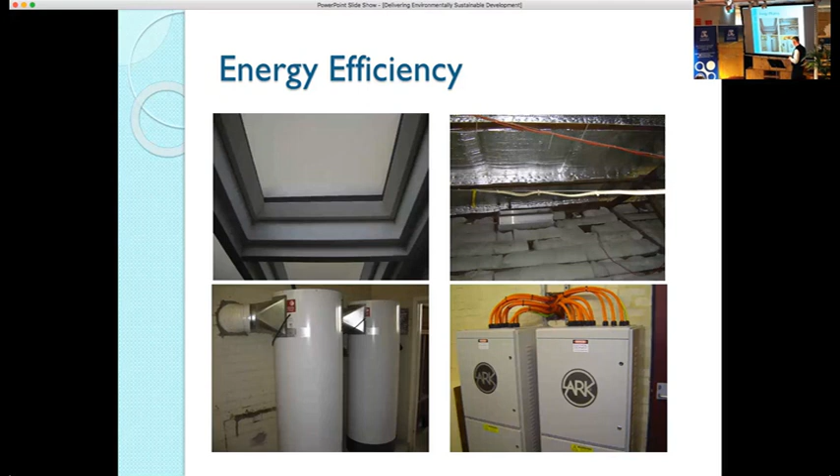Of course, thermal pool covers in the aquatic centres, and that is one of the aquatic centres that I mentioned before, with those large windows that are now triple glazed and very well insulated. Demonstrable savings as a result of putting thermal pool covers on those pools overnight, because you're maintaining a temperature of 30 degrees. It's also an asset protection thing, because it's very corrosive, humid air, and it can really destroy your building, more so than salt environments. So it helps reduce that as well. So it's a bit of asset protection.

That's not a very exciting photo, but that is a comprehensive building management system with a series of direct digital controllers that controls all of the building mechanical, some hydraulic, some lighting, and various different things. What we do now as a policy with new buildings is link the building management system to the security system through a series of relays and contactors and main switchboards, which is an easy way to control whether things are on when nobody's there. If nobody's there, then nothing needs to be on. So once that security system is armed, the electronic components in here just shut down the things that don't need to be on.

Solar PV and hot water. We've done a lot of smaller solar systems, but a couple of years ago we moved into the commercial space. We've pretty much maxed out the roof that we can in most of the council buildings now, so we've got about 660 kilowatts installed across council buildings. There's bits and pieces more to be had. We've got what we call a solar on lease program. We work with community groups that are lessees of a council building, but they pay the utilities.

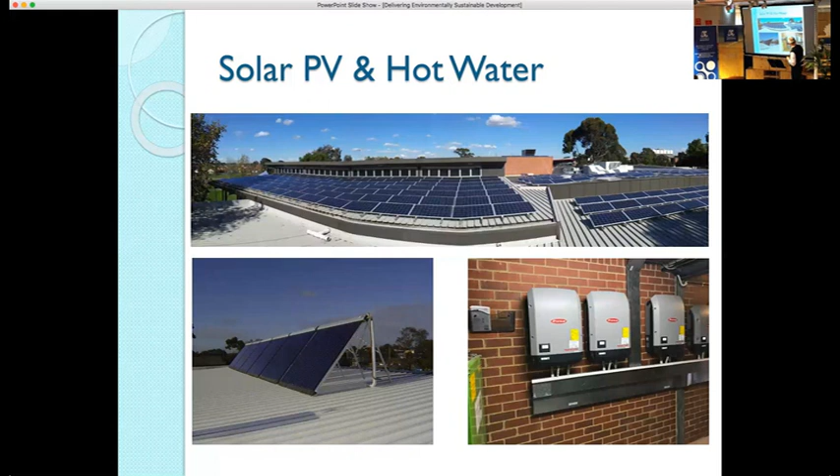The project we developed actually won a UN award last year, because it was giving those community people access to solar without having to come up with the capital. We design, install, own and operate a solar PV system on a council-owned building where somebody else is paying the utilities. The tenants then pay us back over 10 years, but only with 80% of the savings achieved by the solar system, so they get a 20% saving on their electricity bill straight up. Once that's paid off, all the savings go to them and they won't be charged for any maintenance. So that's an 80 kilowatt system at the Coburg Leisure Centre. And of course, the commercial scale solar hot water at some of the aquatic centres, and the inverters that go with those large systems as well.

Then we get into HVAC. We've done a lot of work on HVAC. Before solar became so cost competitive, and I remember years ago, when I was at Darebin Council, they asked me to do a paper on a microgeneration feasibility study, and that was back in the days when the general price of solar was around about $4.50, $5 a watt. And it's quite a bit different now. And of course, back in those days, it really wasn't financially viable.

So if you did it, it was for aspirational reasons. But essentially it's all changed now. The school of thought in those days was do all your energy efficiency, establish your base load, and then put an appropriately sized solar PV system on. The irony of that is that if people didn't want to do energy efficiency, the solar PV is probably the best bang for buck as far as energy efficiency is concerned. And obviously we're not promoting doing that.

But what was the best bang for buck back in those days was the HVAC systems, because generally you would find, particularly in a commercial building, that 60% of your load would have been heating, ventilation and air conditioning. So there's a series of examples that we've done there. The council has an aspirational target to move away from fossil fuel for stationary energy.

Pretty much all the new buildings we bring on stream now are all electric buildings, and it's mandated that 20% of the energy that is likely to be consumed by that building has to be produced with renewables on site. So it mandates a solar PV system as part of the build. But pretty much the only place we use natural gas now is to heat water in public pools.

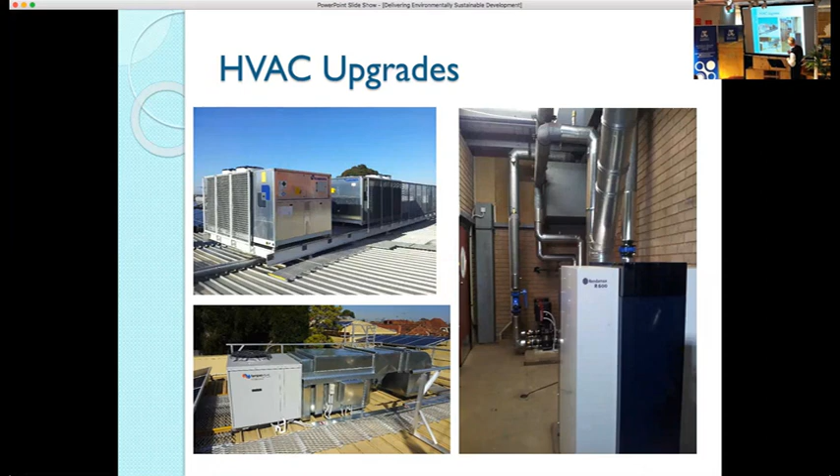And then, of course, lighting upgrades. We've done a lot of work on lighting upgrades over the last 8 years. In the early days, it was all moving to more efficient electronic ballast fluorescents until the LEDs got to a level where they were not only reliable but very efficient. So we've done a lot of work upgrading the park lighting.

And what we've done is brought a lot of our open space lighting, which was unmetered distributor lighting, very poorly maintained and with very poor efficiency levels, to high efficiency LED, all operating in accordance with a public lighting policy developed specifically for the council operations.

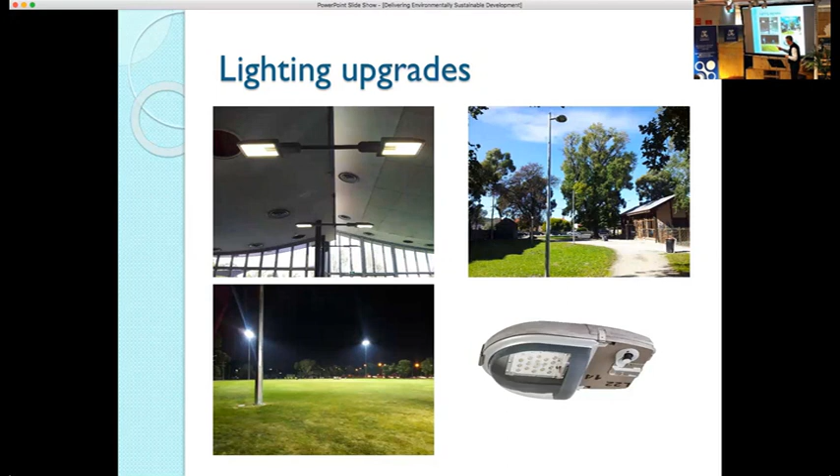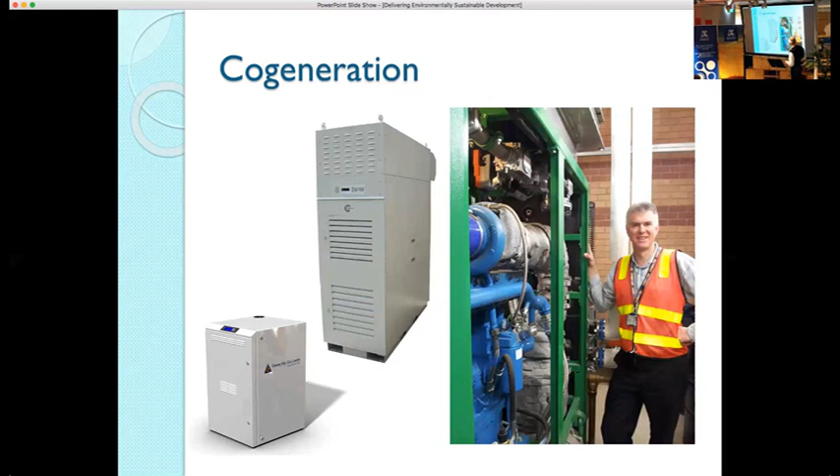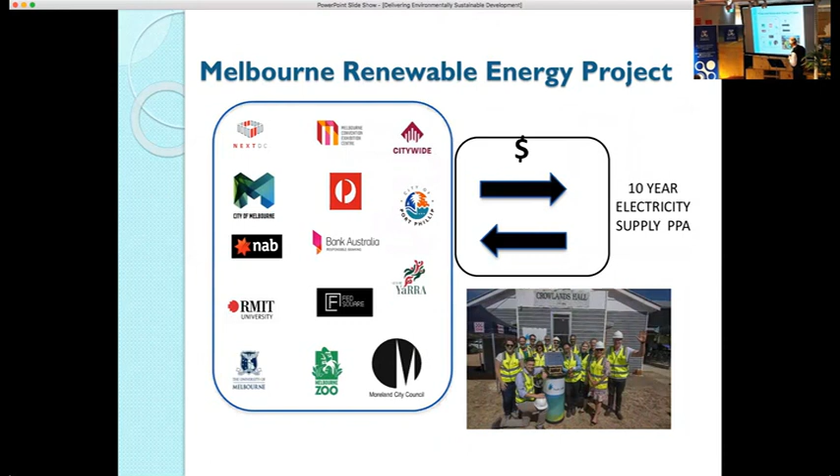The Melbourne Renewable Energy Project, you've probably heard about this one. There's a little celebration we had at the Crowlands Hall a few months ago. And this is a photo of basically Challicum Hills. Now, the project inception was the City of Melbourne. And when we were invited to become part of it, we said, yep, absolutely, that's going to fit with what we do. And I might just go back a little bit. Moreland are a NCOS accredited carbon neutral council since 2012.

Now, when we did that, we actually received a little bit of criticism from local community groups because they said, oh, look, you're just buying offsets and you're shirking your responsibilities elsewhere. And I found myself actually defending the council on a couple of occasions at public forums because essentially I said, look, you would have a fair argument if the council had said, we're not going to give you any energy efficiency money anymore, we're going to spend it on offsets. But they didn't touch my budget, not one bit, because it wasn't what they were after. They wanted to continue to reduce that energy consumption, increase the efficiency, but go carbon neutral and then work back from that.

So when this project came along, it was an opportunity for us to actually solve that problem. The criticism was that we were buying cheap international offsets, although accredited, and we weren't investing in local renewable energy. And so we took that on board. And this project was fit for the task, because essentially it was 14 organisations getting together and going to the market and saying, who's out there that's prepared to build a renewable energy generator that will provide our organisations' corporate requirements, the power that we need? The total load

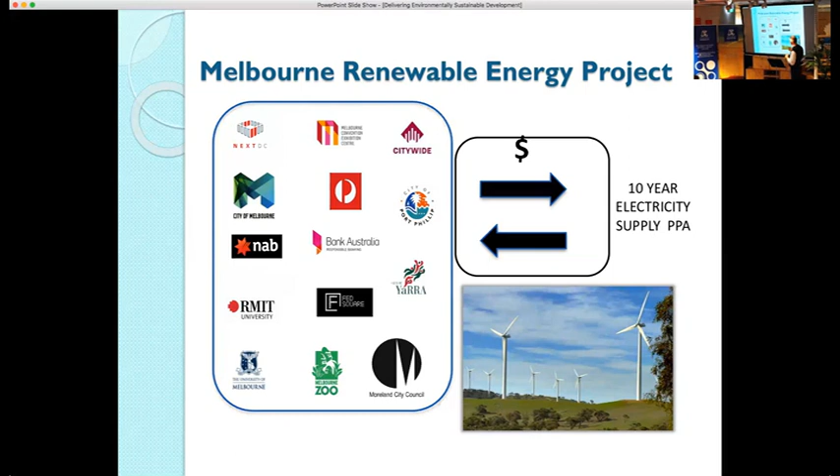And then, of course, electric vehicles, and back to my roots. And so we got involved in the Victorian Government's electric vehicle trial back in 2012, and we had one of their Nissan Leafs for about 6 months. It was a really successful trial. In fact, the vehicle that we had, I think, holds the record as the largest mileage vehicle for that 6-month period, because essentially what we were doing, we wanted a true assessment of what this would be like in our

fleet. And then, of course, while we did that, we put in a business case to the Victorian Government to actually fund the first electric vehicle fast charging station in Victoria, which is at Coburg Civic Centre and still operating to this day. Immediately after we finished the trial, we bought our first vehicle, which is this one. We logoed it all up to celebrate.

And then, of course, we're on a journey now to transition our passenger fleet to zero emissions vehicles. And only 2 weeks ago we adopted a new fleet policy that basically talks about zero emissions first. And it also mandates that if the fallback option has to be a vehicle with an internal combustion engine, it's got to meet stringent emission standards. And those emission standards are 100 grams of CO2 combined per kilometre, which would be one of the toughest in

Australia. And just to give you an example, a hybrid Camry and a hybrid Prius station wagon do not meet that policy. And so it essentially means that you couldn't actually have a vehicle in the fleet unless it's got some form of electric drivetrain. And that is a blueprint on a path to zero emissions eventually. And obviously that's why we want to go for zero emissions, and that's where the hydrogen kicks in later on.

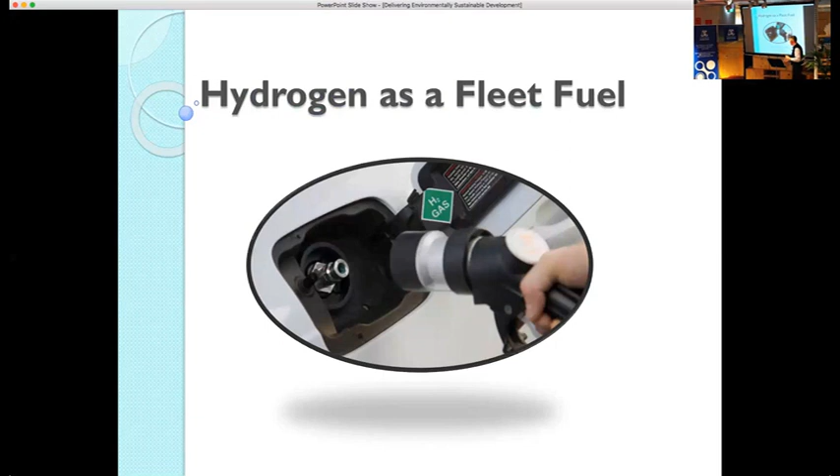I said to a group of people who were having an argument at a presentation, look, you're arguing about something that's irrelevant. The guy over there, the fossil fuel guy, is laughing at you. You're just tearing yourselves apart, and it's not worth it. It's basically about the right technology for the right purpose. And that's one of the reasons why we've chosen to go with hydrogen fuel cell in the heavy vehicle space, and I'll go into the reasons why in the presentation.

Now, this basically was extracted from a presentation I did at the Eco Cities Congress last year, and they are the primary reasons that underpin the reason we're moving in this direction. We need to understand the urgent need to reduce emissions from fleet operations, and of course, particularly heavy fleet.

Now, where that's relevant, the Moreland Council, and most councils would be the same, have waste collection. And we turn over probably 600 kilolitres of diesel a year for council operations. That's actually come down a couple of hundred kilolitres over the last few years by incorporating efficiencies. Of the 300 diesel vehicles we have in our fleet, only 17 of them use 60% of that fuel, and that's waste collection.

You talk about, you know, fuel economy that's really good of 5 litres per 100 kilometres. Try 120 litres per 100 kilometres, and then you're talking in a different space. The second one, of course, and again, that comes back to my roots as a mechanic, recognise the inefficiencies associated with continued use of internal combustion engines.

They met a purpose 100 years ago, but they really are a shocking idea. You know, the idea that you compress a hydrocarbon, ignite it, it goes bang, and all this crap comes out the back, and that's the way we choose to go from point A to point B in the 21st century. It can be done better, and that's the reason we need to move to electric drivetrains. And then, of course, that speaks for itself. Again, moving renewable energy into the fleet fuel space, and that's the best way to do it.

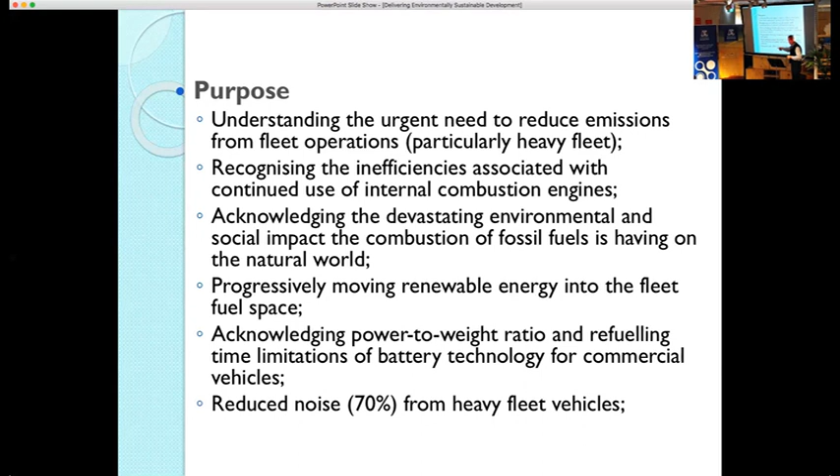And this is a big one for us. We've got a curfew on our operations centre at the moment because people complain about those 17 trucks starting up, idling for 10 minutes before they go out and do their business. So we know that they can lift off straight away and they're 70% quieter.

So how does it all work? Green hydrogen is what we're talking about. We're not talking about hydrogen made from fossil fuels by steam reformation or any other method. We're talking about green hydrogen. So basically what we'll do is we'll harvest stormwater. We're planning to put about a 1.2 megawatt solar system on site and also have a grid connection agreement with a wind farm operator that's got a large portfolio so that we can run the electrolyzers overnight and keep making hydrogen, you know, as long as you've got the water.

Just to give you some basic figures, it varies a little bit, but generally speaking, when you electrolyse water, you need about 11 litres of water and about 35 to 45 kilowatt hours of electricity to make 1 kilogram of hydrogen. Now, 1 kilogram of hydrogen has an energy content of around about 33 kilowatt hours. And then if you use that hydrogen through a fuel cell and accept the losses through the fuel cell, you end up with around about 23 kilowatt hours of usable energy at the wheels.

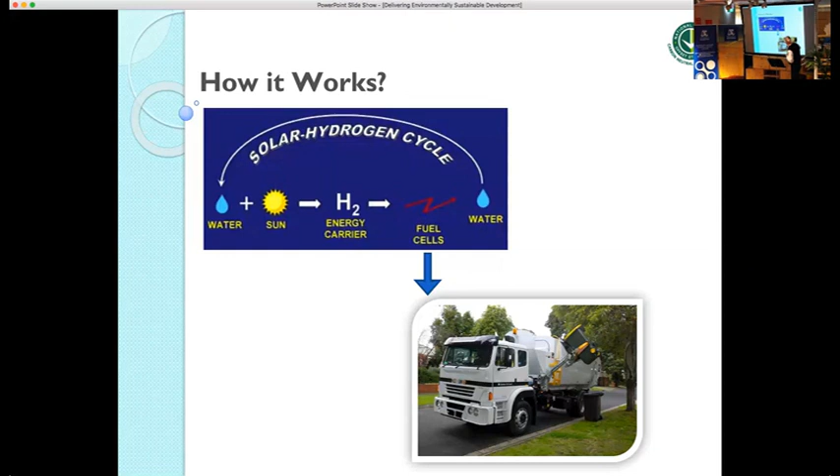And that's where the power to weight ratio comes in, because you're talking about 23 kilowatt hours in a kilogram of hydrogen versus, let's give the batteries the benefit of the doubt, say 300 watt hours per kilogram. And that really is the difference. And so it comes back to what I said before, horses for courses. So once you've created your hydrogen, you in future put it into a hydrogen fuel cell vehicle, and then you're completing that picture.

And the only byproducts of the process are water and heat and a little bit of oxygen. So this technology is not new, but it's been developed and refined over the years, and the proton exchange membrane fuel cells, which appear to be the particular fuel cell of choice for the vehicle manufacturers, are really achieving sort of great longevity and high efficiency. They're running between 55% and 60% efficient these days.

The same as battery density is getting better, the efficiency of fuel cells has gone up about 10% over the last probably 6 or 7 years. And so it's constant development, supply and demand. And so that's basically how it works.

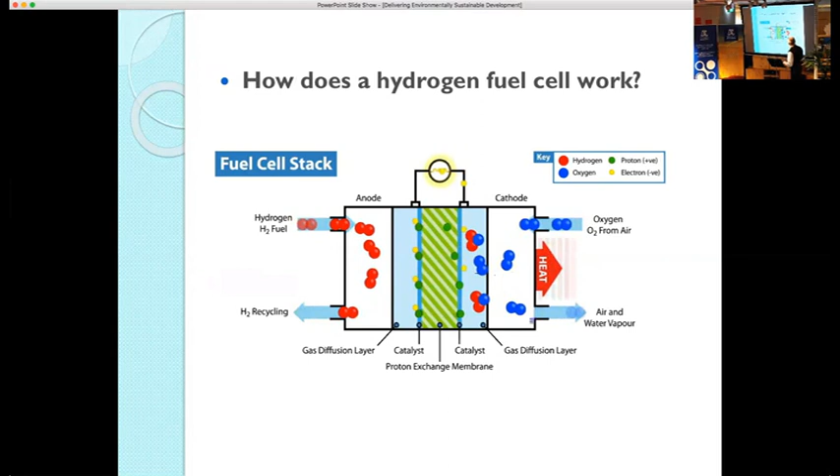Now, they've changed a little bit. But typically what you'll find is if you want to replicate the duty cycle of a conventional vehicle with an internal combustion engine, and assume that it can go the same distance and do all the same things, then using batteries to do that, you're going to be looking at somewhere between 30 and 40% heavier. It's no secret that a Tesla Model S weighs 2.5 tons, and a lot of that is the battery. The Toyota Mirai is a slightly smaller vehicle, and it actually does have a heavy battery in it. They've used Toyota's nickel metal hydride battery, and it weighs about 1,800 kilograms, but it can go the same distance.

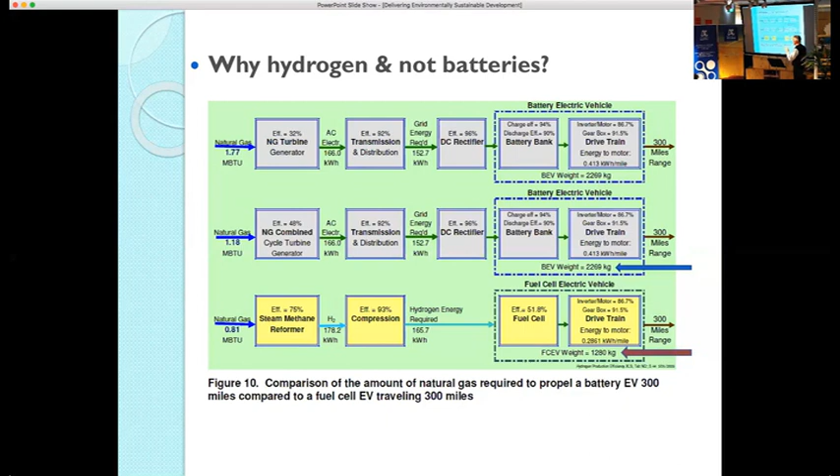Now, I've driven a hydrogen fuel cell vehicle, and you wouldn't know that you're driving a hydrogen fuel cell vehicle. You would think it's just a battery electric vehicle. The response is exactly the same as anybody that has driven an electric vehicle. And so the way they've worked it in is very, very good.

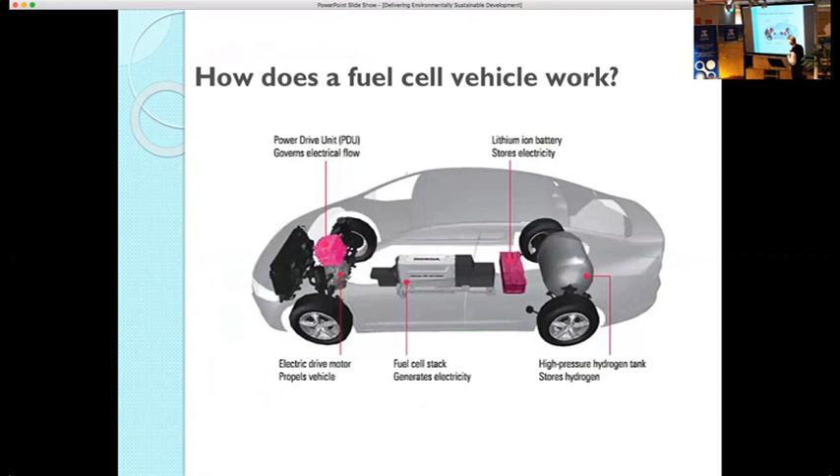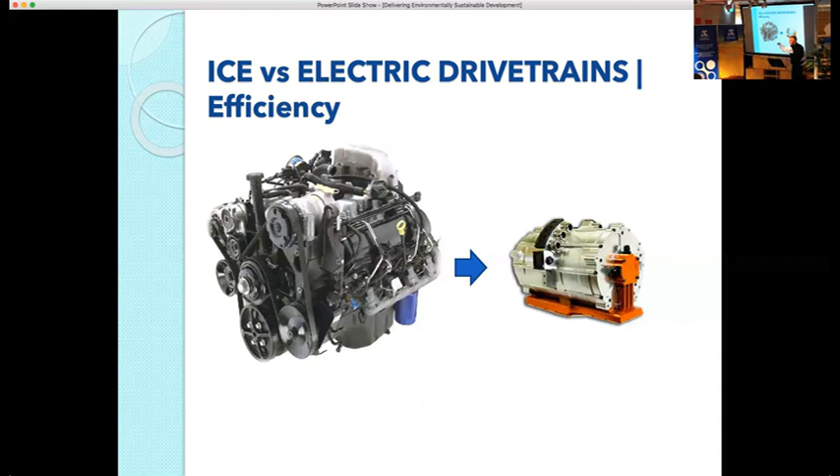It really doesn't matter that the Tesla weighs 2.5 tonnes. The electric motor doesn't care. It's got so much torque, you wouldn't even know it. But when you've got payload, everything matters, because that's basically what it's there to do, to keep the tare weight of the vehicle down so you can increase your payload and then get more efficiency out of the vehicle. Range. Hydrogen fuel cell vehicles typically have an equivalent range to an internal combustion engine without payload compromises.

Refueling. Again, this is something that scares people when you start to talk about the pressures in these hydrogen tanks, but I'll talk about that a little bit. The Type 4 tanks they're using now are 700 bar, which is 10,000 psi. And the reason for that is that hydrogen is energy dense, but you need to compress it to get it in a small space to get that density. And of course, if you haven't got a lot of space for tanks, then you need to compress it to a high pressure.

Generally, the hydrogen fuel cell buses you see overseas have got 350 bar tanks, so it's a lower pressure, but there's more tanks and more area of tanks because they've got all that roof to fill up with tanks, and so they don't need to run the higher pressure. And they can run a higher flow to fill them up quicker because they generally have about twice the amount of hydrogen that a waste collection vehicle would use, so it can do its daily cycle.

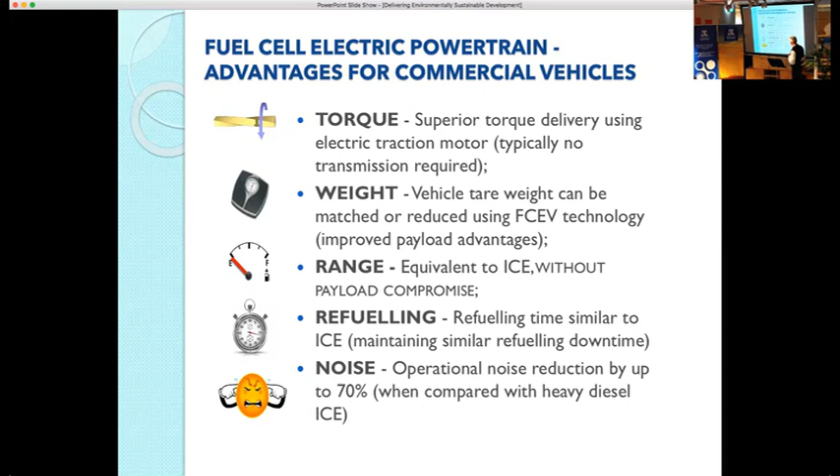So when we went to a global heavy vehicle manufacturer to actually say, will you build us prototype vehicles, we went to them with design criteria, because we weren't going to say, look, can you build a truck just for us to do what we want to do? We were going to say to them, we want you to build a truck that'll suit us, but it'll suit any other customer that you sell that diesel derivative to. And so to do that, it needed to be able to do everything that the diesel version does now. And so we set up these basic vehicle design criteria to make sure that the project is a success.

And I might just qualify that, I've been involved over the years with different retrofit projects for electric vehicles or zero emissions vehicles. And I've read a lot about some of the projects, and what you find often is that if you want to bring the masses on board and say this is the way we need to do it, they fear change. And if you say, look, here's a battery electric vehicle, but we haven't given you a fuel gauge, we've given you this little battery meter, a little amp meter, and you need to read a book to know how to use it, they'll just glaze over. I've seen it happen.

So, taking all those experiences on board, I said to the global vehicle manufacturer, and I was in a government office in Spring Street when we were talking about funding with the state government, this truck has to be the Tesla Model S of trucks. Now, the reason that car is successful is because they're not building an electric car, they're building a really cool car that people will want. It just has a different drivetrain and uses different fuel. We've got to make this the same.

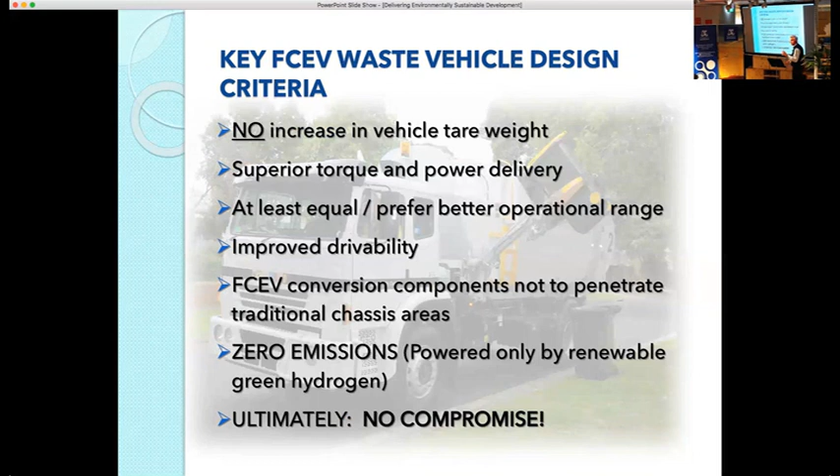This is an example of the sort of setup that you would see for a commercial scale hydrogen refueling station. So you've got your solar system on all your hard stand areas there, feeding into proton exchange membrane electrolyzers. And in this case, you've got 1.5 megawatts of electrolyzers. You've got the compressors to compress it. You've got buffer tanks where your low pressure is stored. You've got constant pressure tubes, and then you've got your cascade storage.

Now the cascade storage, that's got some scary numbers up there. That's got 15,000 PSI in those constant pressure tubes. And the reason for that is that, and another reason why you're starting to see hydrogen being talked about a lot for large-scale energy storage. You know, we've got the Tesla battery in South Australia. Well, you can store a lot more energy in a much smaller footprint if you're storing it in hydrogen.

But the important thing, and this is what the technical people say, is that it basically will store forever. It doesn't degrade. Like a battery will trickle down over time. Every battery technology does. So you're not short cycling the compressors all the time. This constant pressure tube, so you've got your fuel bowsers. So you walk up to your fuel bowser, you plug it in, and then you fill up your tank. Essentially, the compressors don't need to run because you've got a high pressure tank that's just equalizing with a lower pressure tank. And it's doing it very quickly.

And as I said before, we're talking, say, with the waste vehicles in the numbers that we've run, about 22 kilograms of hydrogen to match the 280 litres of diesel. There's a really complicated formula to work out the energy component and then the efficiencies and inefficiencies of the two different drivetrains. But essentially, those 22 kilograms of hydrogen will match the 280 litres of diesel, and that'll probably refuel in about 10 minutes, which is not that far removed from what it would take to actually refuel your 300-litre diesel tank.

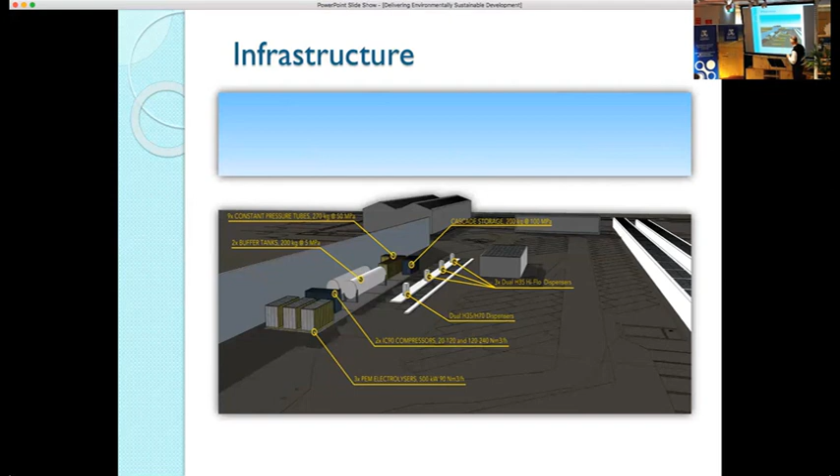Now, this old chestnut, is hydrogen unsafe? This doesn't come up a lot for me when I'm in technical forums, but when it's a room full of average punters, all they want to talk about is the Hindenburg. Now, there's a couple of things here, and I put this in there because the title of this article from a study that was done in the US years and years ago is just gold. Don't paint your airship with rocket fuel, because in the 1990s, an ex-NASA scientist, it was his life's work after he retired from NASA to find out exactly what happened in that accident.

The interesting thing also is because hydrogen is 14 times lighter than air, which is why they use it for airships. In fact, it's double the lightness of the helium, which they use because it's safe. Helium's only 7 times lighter and it's more expensive, and this is one of the reasons why they did it. But interestingly enough, when it burns, it just burns quickly up, so fast that you almost don't even feel the radiant heat coming from it.

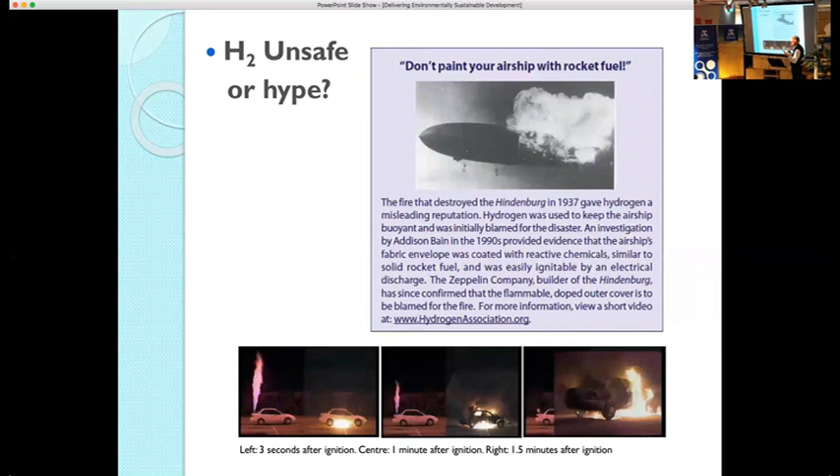In actual fact, in the testing that they did on a particular tank, they tried everything. They put it in a car and they crushed the car between 2 prime movers at 60 kilometres an hour so that the only thing left was the tank and it didn't breach. They did all those sort of tests. The only thing that did it, they fired a 50 calibre armour-piercing round at it twice in the same spot. That was the only thing that let it go. And so, the interesting thing is that the same material they use to make these tanks is what they line the fuel tanks of military aircraft with so that the bullets can't penetrate the fuel tank. And so it sort of goes with the territory.

Now this is a little thing. That's me, and why you might think it's strange I'm underneath the car. That's a Toyota Mirai. Now, one of the things we talked about before, one of the byproducts of putting hydrogen through a fuel cell is that when those protons and electrons actually meet up with each other on the other side of the cathode, they turn back into H2O. And so they produce a lot of water. And the amount of moisture they produce is directly proportional to how much hydrogen you're pushing through the fuel cell.

So what Toyota have done is very clever. It's actually got a little condensate tank underneath the car. And so the condensation from the fuel cell accumulates in this tank. And of course, as you're driving along the freeway, it just vents out of the back of the car. But there's a little button on the dash that says H2O. And the reason they've done that is so you don't end up with a big pool of water on the garage floor or on the driveway, you press that button as you're driving down the road, before you enter, and it just vents it from this tank. Now, what's coming out of that vent is 75 degree, 99.9% pure water.

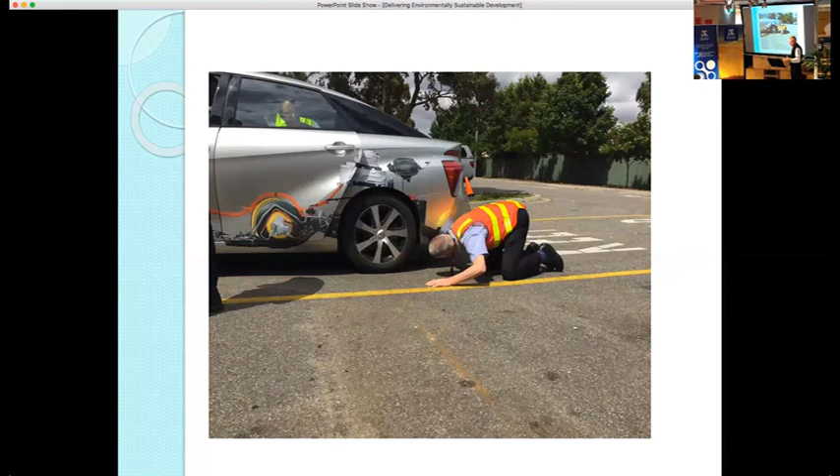So I needed to demonstrate that, and people get really sheepish about it because they think, well, you're just putting a cup under an exhaust pipe, and you think of the condensate that comes out of an exhaust pipe that's full of toxic chemicals because it's coming from a carbon-based fuel. And so I needed to demonstrate this to show that, and there's a tea bag in that. There is a tea bag in that.

And I'm alive today. No problem. Drinking cold tea. Well, it was actually hot tea. It was generally 75 degree water.

Now, I put this in here because when we're talking about mobility and fossil fuels and emissions, it's on everybody's lips these days. And a couple of statements that I've used in various different presentations are really important to focus on. The top one, in actual fact, I met the author of the report that I plagiarised to grab this paragraph out in a conference up in Sydney about 3 years ago. And basically, he was the guy that was asked by the West Australian government to actually write a business case on the feasibility of running those hydrogen fuel cell buses in Perth.

And what he was at pains to point out to the government was that you're asking me to compare a $1.2 million prototype with a $680,000 standard diesel, but you're not asking me to incorporate the upstream and downstream impacts of running those vehicles. And so that pretty much sums it up, because if you don't impose a cost on fossil fuels to reflect damages arising from their combustion, you are effectively applying a subsidy. And if you're doing that, you'll end up with an inefficient use of resources. And this is one of the reasons why we need things like carbon taxes, because the polluter must pay. And as I say, it's an irrefutable concept.

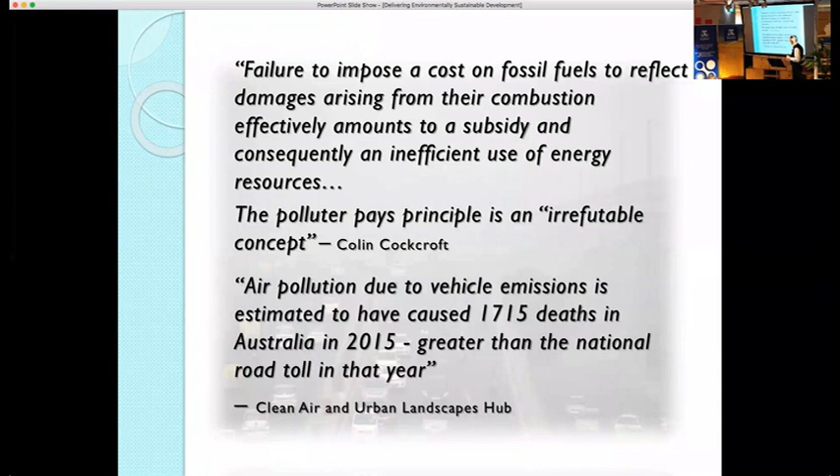With the waste trucks, are you doing energy recovery as well, like hydraulic accumulators or something like that? Because they do a lot of stop-start. Well, no, not hydraulic, through the motor itself. Yeah, so you're just reversing the motor, like we do in electric vehicles. So you've got some of that there already.

Yeah. So what we're looking at is two 60 kilowatt fuel cells where the engine bay is, and then a buffer battery where the transmission would normally go of around about, say, 45 kilowatt hours. And then you've got your traction motor, which is 160 kilowatts and capable of 2,500 Newton meters at 350 amps.

The interesting thing about that, one of the projects was being done in North America, where they were doing this on a Class 8 truck. They found out the hard way how much torque an electric motor has, because they were breaking axles. And so they had to actually write some new algorithms in the firmware. So when the guy put his foot on the accelerator, the computer was controlling what went to the motor, not the guy with his foot.

Thanks, Stuart. Really exciting.

So many questions, I can't even remember them all, but some of your early stuff where you're giving examples of what you've done on buildings and the lighting and stuff, quite apart from the environmental benefits, are you able to reel off any payback periods? And another one was just on the swimming pool, where you said you managed to stop the condensation between the windows with some sort of venting. I'd be really interested in hearing how you did that.